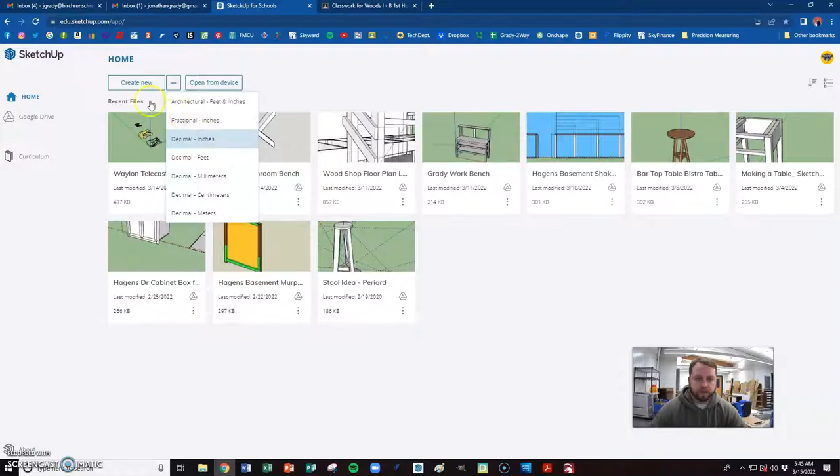So I'm here on SketchUp for Schools, and there'll be a link for this on the assignment, and we want to create new. And just to be sure, it's always a good idea to check this, and let's work in decimal inches today. So we're going to click on that if you're not already there. Alright, and now we've got our drawing.

And then to check this out, this is what the assignment will look like a little bit for you. Here is what the flip top box looks like if you finish building it. Okay, and then what we need today is this diagram right here. So this is what we're going to be working from, and we're going to draw it all assembled. Here it's broken apart so that you can see the pieces. And so we'll draw it all put together. But this is what we'll reference for our measurements.

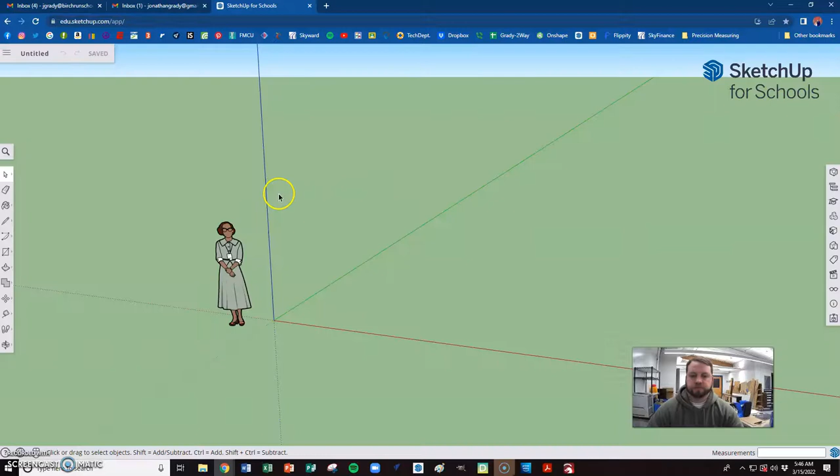And so let's go ahead and start with this front piece right here in our drawing. It is 9 inches this way and 4 inches this way. And all of our material is 1/2 inch thick. So 1/2 inch this way. So 9 by 4 by 1/2 inch. Zoom in a little bit. If you want to delete this later, you're more than welcome to.

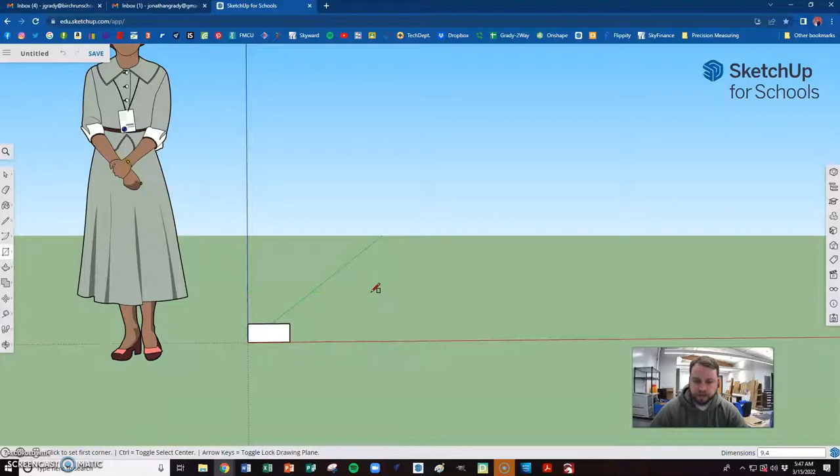And so I'm going to hit R for the rectangle tool, and I'm going to start right in the origin and orient my camera so it's this way, and we want this green rectangle just like this. Okay, and if I look in the bottom right corner down here, the long number is first, so that's what I want to make, 9, and then comma, 4, enter. So I clicked once and did that. And then we're going to push-pull this, 0.5. And now we've started making our front.

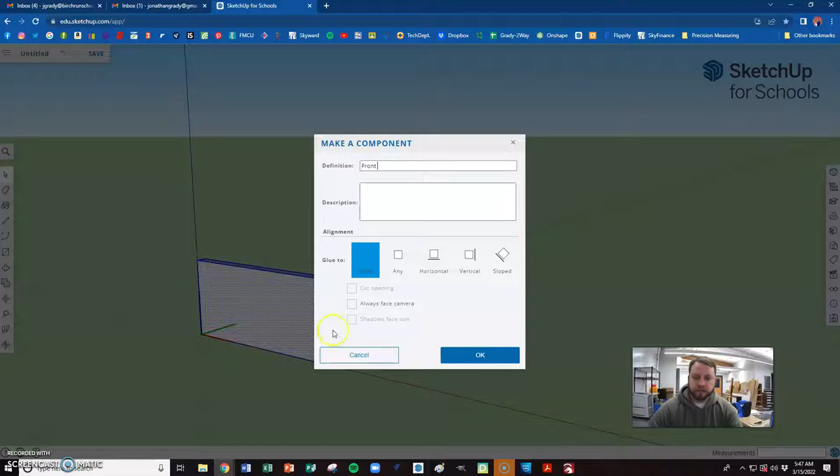Okay, so now I want to hit the space bar and it gets to our pointer tool. And we're going to triple-click that, right-click it, make component, and we're going to call that front. And then hit OK. And now we can see that everything is locked together. Okay. I guess we can do this other stuff right now as well.

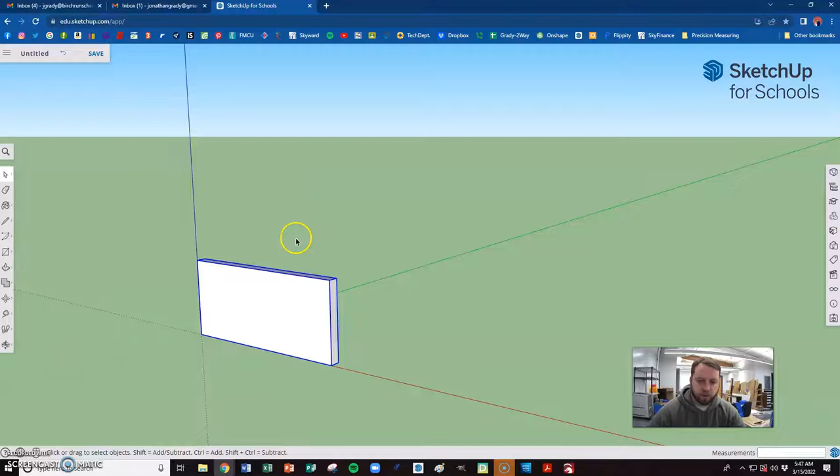So then we're going to go 3.5 inches in, then leave a 2-inch opening here, and then another 3.5 inches here. And that's where this lid tab right here is going to fit, in this notch. And we know that this is 1/2 inch thick, so in order to make room for that, we're going to make this 1/2 inch down. Alright, so we still have our pointer tool here. I'm going to triple click, and I'm going to hit T for tape measure, and click anywhere on there except for where the point is.

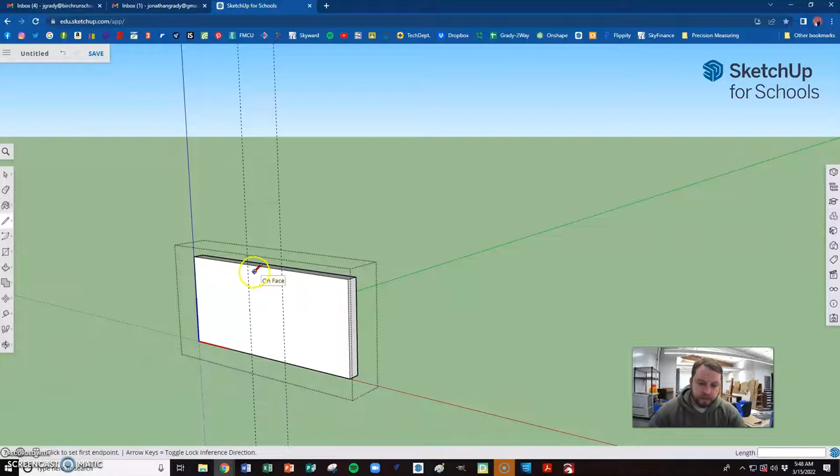And then come in, whoops, bumped my mouse, come in so it's on the red line, 3.5, do the same thing down here, 3.5, and then I'm just going to grab the line tool, so I hit L and go up to that point, down, 0.5, keep going over, now we want to go 2, should land right on that line, and then back up to that point.

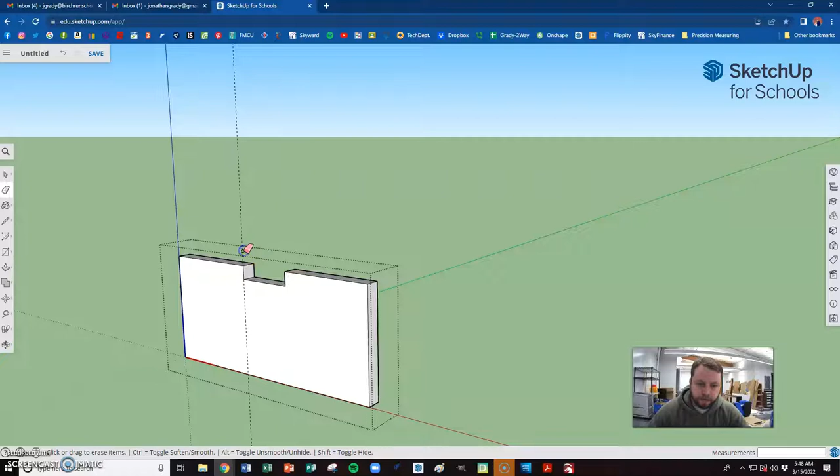And then I'm going to hit P for push-pull, click on this tab, take it all the way back till it stops. Now I'm going to hit E for eraser, click that one, drag it over that one, and now our tab is in there.

And then we've got to add this little rabbet right here, which you guys are familiar with how to do on the dado saw, but we want to come in half the distance of this. So our entire thickness was a 1/2 inch. We want to come in half, so that's going to be a 1/4 to there, and then a 1/2 inch down to there to make room for this piece to fit in there.

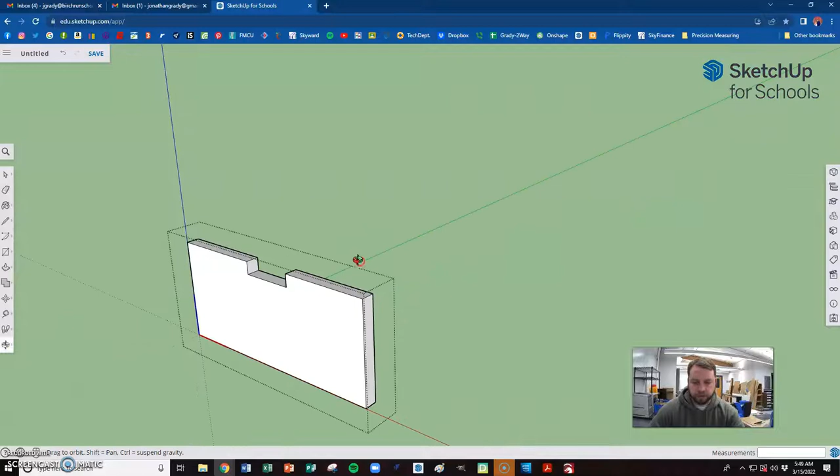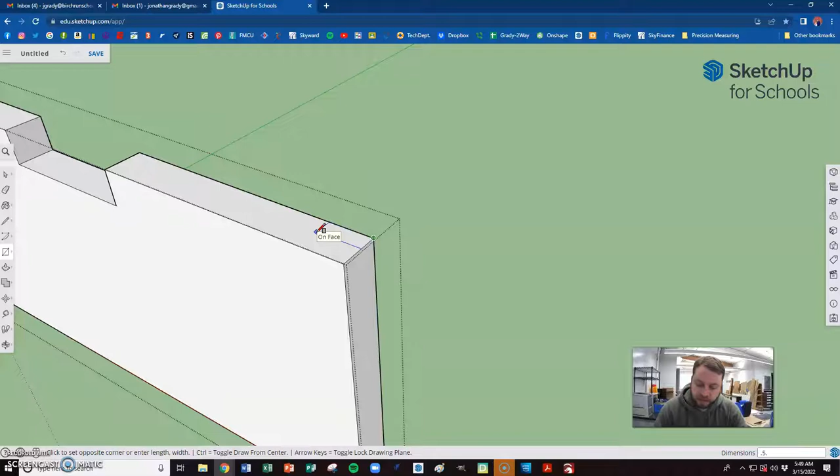So we triple click it again, and I'm going to do this a little bit differently. This time I'm going to hit R for rectangle. I'm going to go to that corner, kind of drag it down, bring it out here. And then again, if I look in the bottom right down here by my camera shot of myself, you can see that that first number is the bigger number. Okay, so that's the one I want to be 0.5. So I'm going to hit 0.5, comma, 0.25, and then I'm going to hit enter. And then that's the size rectangle that we need.

And I'm going to do another little trick here. So I'm just going to highlight that square. I'm going to hit M for Move Tool. And I'm going to click right on that corner. And right now you can see it's moving. And then I'm going to tap the Control key one time on my keyboard, the lower left-hand key. And now I'm making a copy of that square. I'm going to bring it down there, put it right there. I hit spacebar to get back to the just arrow thing.

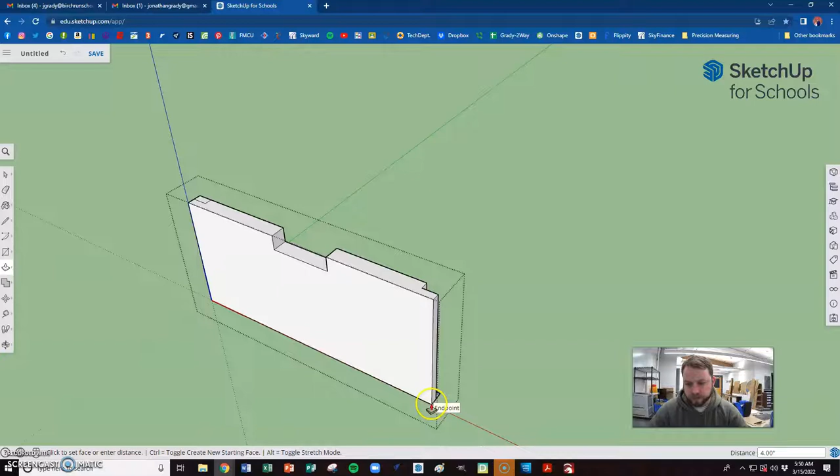And now I'm going to hit P for push-pull. And I'm going to take that all the way down, so 4 inches to the bottom, and that gets rid of that. And now I can just double-click that real quick, and it will get rid of that because I already had my distance set on my push-pull tool. Okay, pointer tool, click outside of that component to close it. And now our front is pretty much drawn.

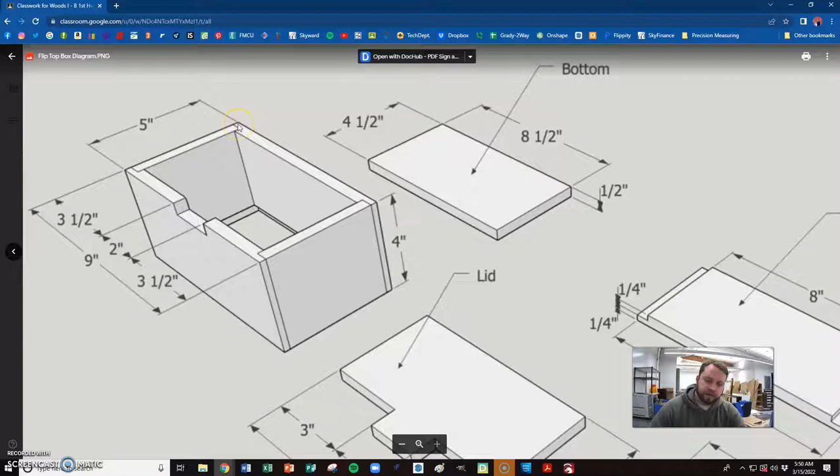Okay, and so now we just need these two, from here to here is 5, but you can see that we got to fit it inside there. And so our ends, our right and left sides, the ends, are actually 4 by 4.5 that will fit right in here. All right, so let's go back and add these.

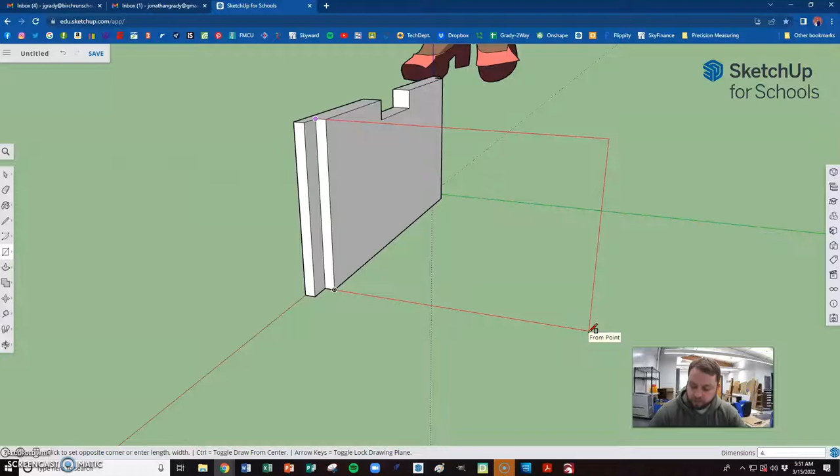Kind of orient so you get a little bit better view here. R for rectangle, click right in there. I want this one to be red. Okay, and the first number, so I'm dragging it out to make it longer so I can tell the difference in the numbers. I want to be 4.5, comma, 4. Should fit right in there.

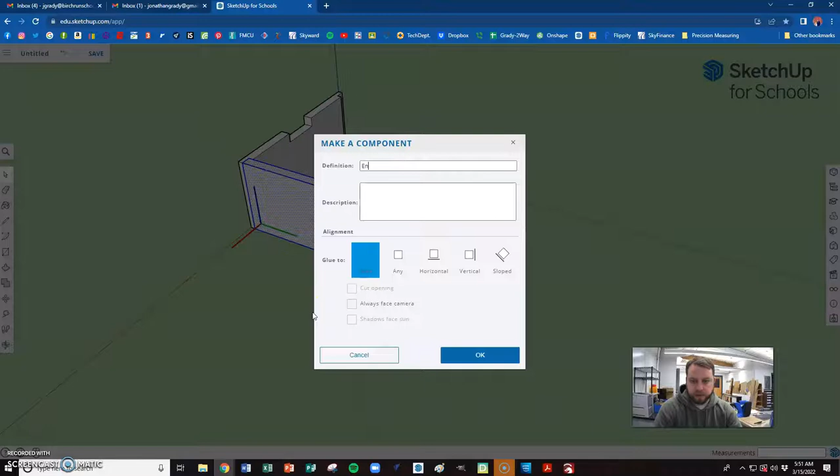Push pull, and you can type 0.5 for a half inch. Or I can reference the end of this, since I already know that that's 0.5 also. So I'm just going to click there, and I know that that's in there, so I hit spacebar for my pointer tool, triple click this, right click it, make component, and we'll call it end. And they're both going to be the same.

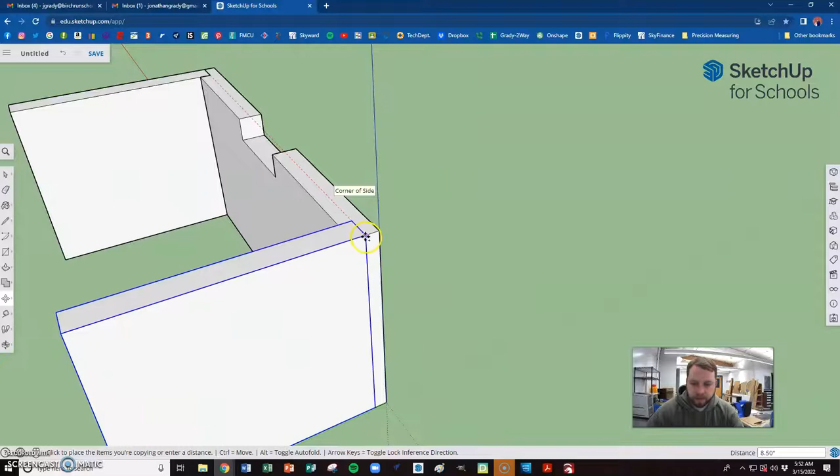So I'm going to hit Move again, M for move. I'll select it, doesn't matter which one, click on that corner to be exact, tap the Control key to make a copy, bring it down so it lines up right there. Okay, so now I've got three parts of my box complete.

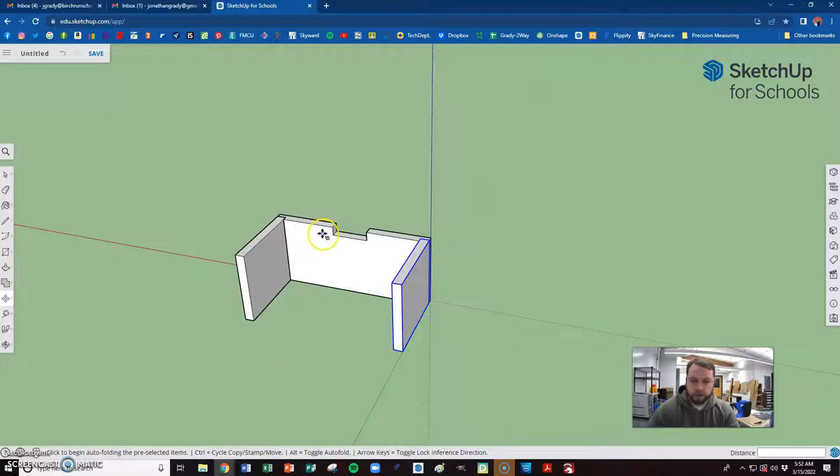Alright, now we just have to draw the back quickly. It's really the same as the front except minus the tab. So here's what we're going to do: hit spacebar for the pointer tool, select that front, click M, then click anywhere. I'll tap the Control key once and move this copy I'm making out here anywhere.

If you go over here and select this little stacked thing and click on it, it shows my outliner. This is the name of all my pieces, and our lady's name is Katherine Johnson - don't have to worry about her. But now I have 2 fronts and 2 sides.

So I hit select to get to my pointer tool, go back to this copy I made, and now I'm going to right click it. What we want to do is make that unique. I'll hit make unique, and now I'll add this so we have our outliner open.

I also want my entity info open. So now what we have is this piece is called front number 1. This is front, side, and side. And we actually want, now that it's unique, to change the name of that.

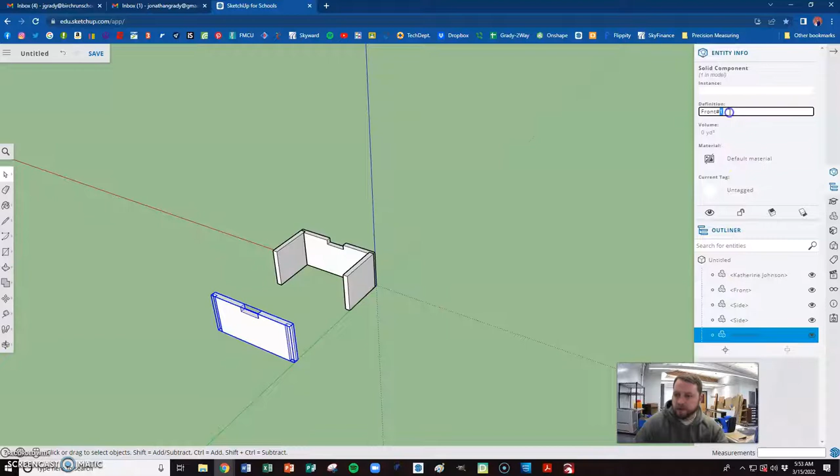So if I drag everything there, we want to change that to back and hit enter. Now this one, instead of being front number 1, is now back. And I can make changes to this even though it's a component, and it won't affect the other. So I just want to add this tab back in here.

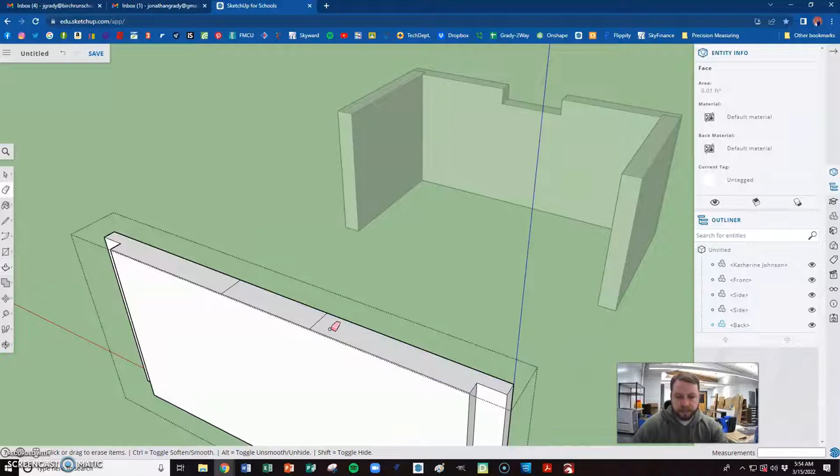I'm going to select P on my keyboard for push-pull, click right there, and bring it back up to this. I'll hit E for eraser to get rid of these lines and heal this surface. Spacebar for the pointer tool, click outside of it, and now we've got the back of our box drawn. Okay, we need to get this flipped around.

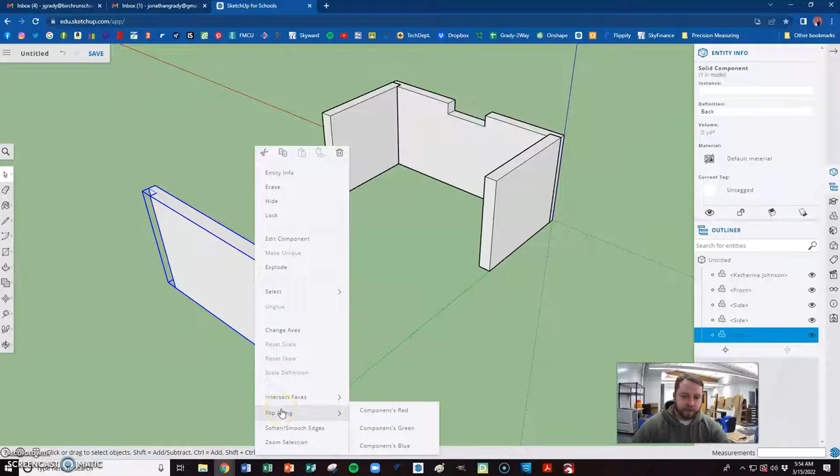You could spin it, but I want to show you another tool that works nicely and makes drawing a lot faster. If I just right click on that, it also gives me the option to flip any part. I think I want to flip that along the green surface, so I right click and go to Flip Green, and it just flipped it around this green line.

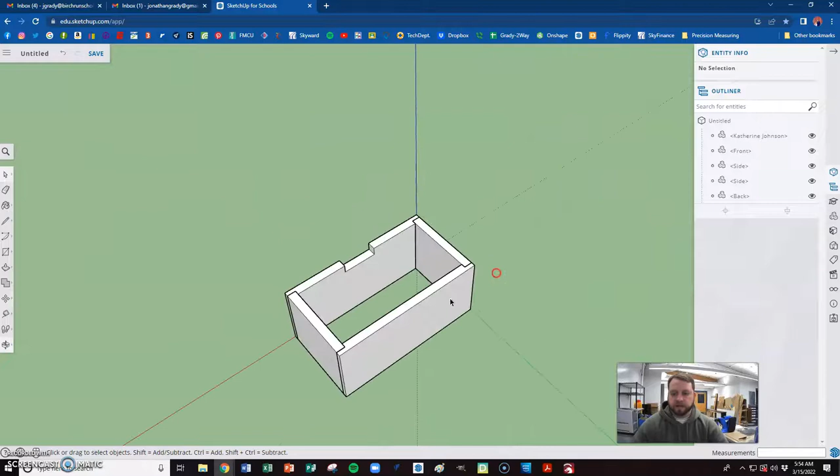Now I can click M and go ahead and get this inside corner right here, taking it so it lines up right on that corner. And now I've really got my box coming together, okay? The front and the back and the two sides are all drawn.

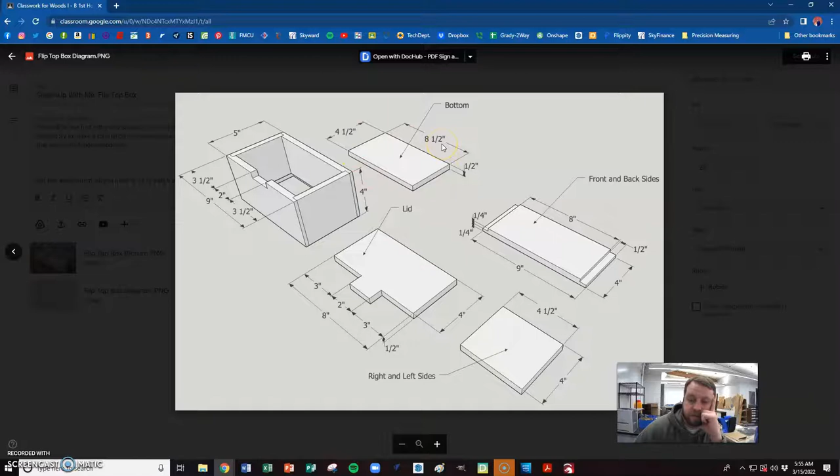Okay, let's go back and look at our diagram here. Now, something that is a little bit deceiving: this is our bottom, and the bottom's just a regular square piece of wood, 4.5 by 8.5. Nothing crazy here.

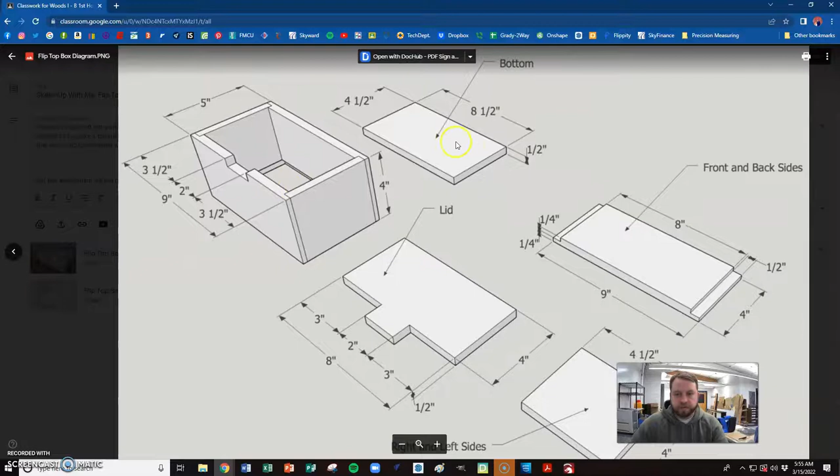But if we zoom in and look at this piece, the side and the back, and then we can assume the front and the other side are the same - they've made a rabbet all the way around the bottom of the box to allow this bottom to fit in there. So we've got to do a little bit of tweaking on our drawing to make room for this bottom. So let's go back into this.

And then we will keep going there. Sorry, I thought I was having a little technical difficulties.